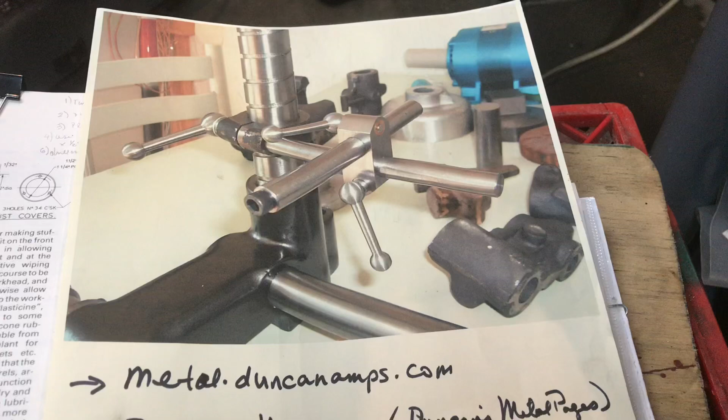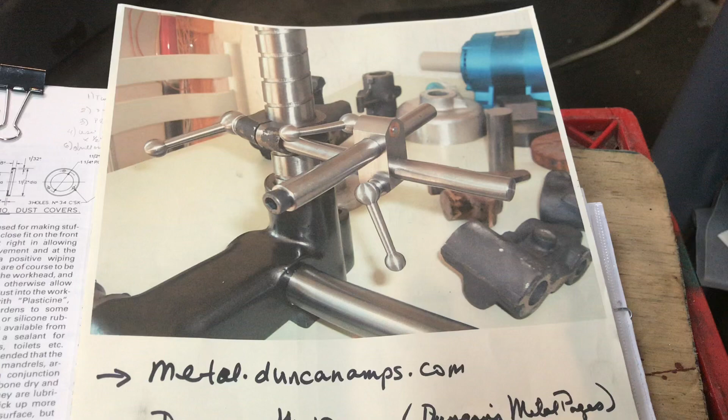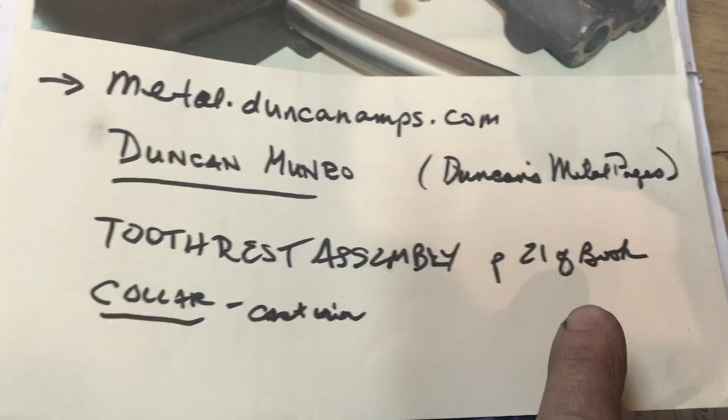I think I'm going to make this the intro and wrap up, and just like I did with last week's post, I will attach a bunch of short videos that I shot, little segments of some machine work to give you an idea. So here's what I've been working on. It's the tooth rest assembly. It's in page 21 of the book for the collar for the tooth rest assembly, and that's this thing right here. And I took this photograph.

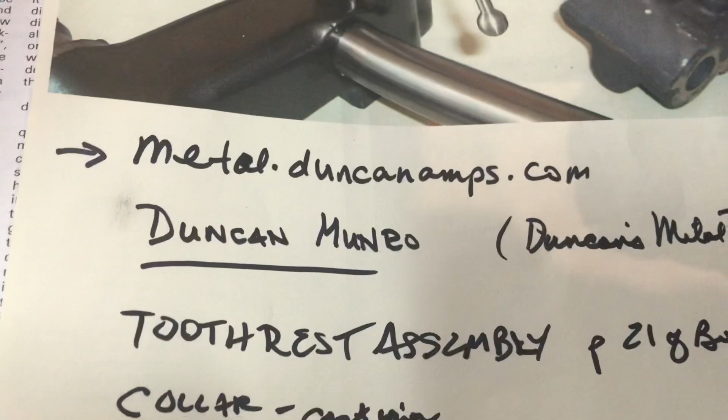This is one of the resources that I mentioned early on when I began the project, metal.duncanamps.com. It's a person named Duncan Munro, and on the page it says Duncan's Metal Pages. And so he's got a lot of small photographs. You can click on them, and I really appreciate this. So I clicked and then I printed it. So you can get a real idea. You know, they say a picture is worth 1,000 words. You get a real idea of how things need to be together and where they go.

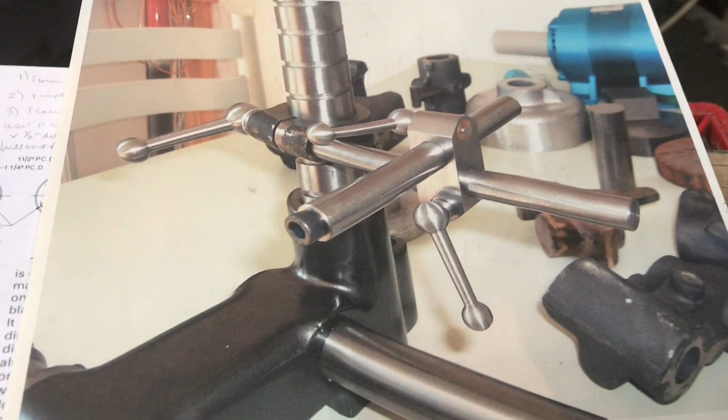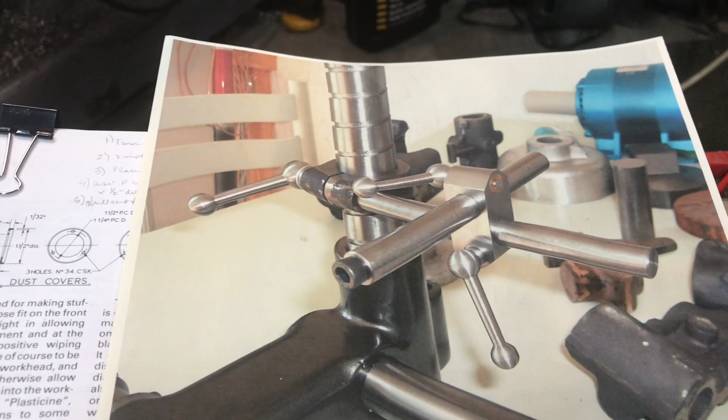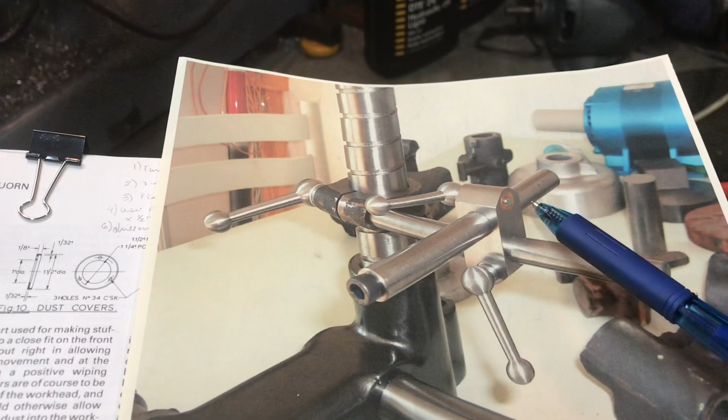Now, those of you that have studied the very much improved Quorn articles by Walter Mueller, you note that he basically doesn't use this whole tooth rest assembly. He has a different one, but then again, he's got that air spindle for his tool grinding. I plan to build this anyway. Two reasons. Well, I had the collar. The cast iron collar came with my set of castings, and then I've got steel pieces that I can make the rest of this out of. This is fabricated from steel, and I've got some nice stainless steel bar here as well.

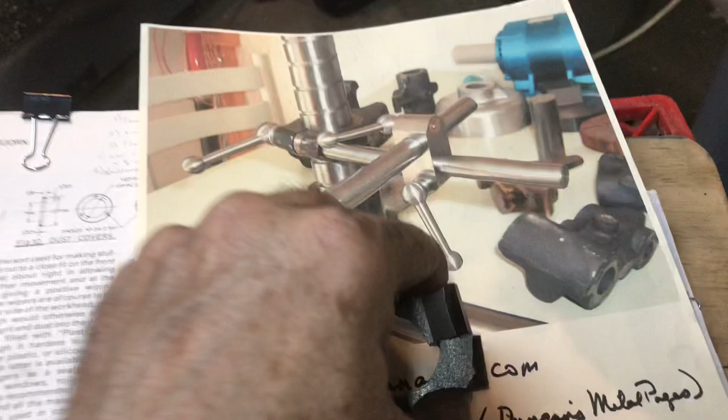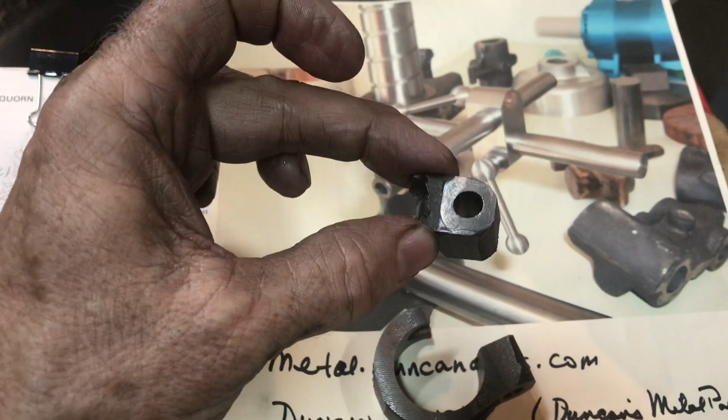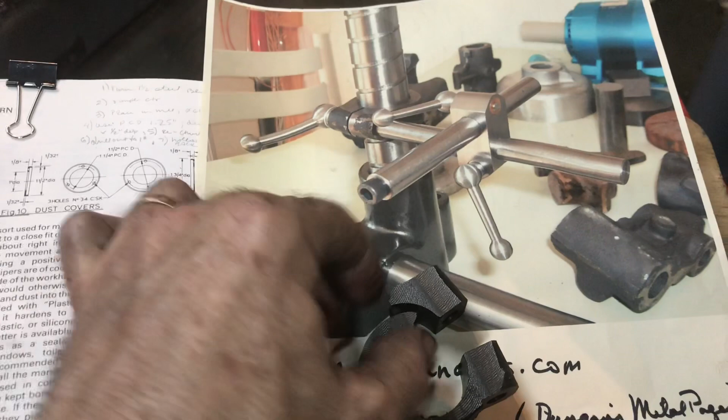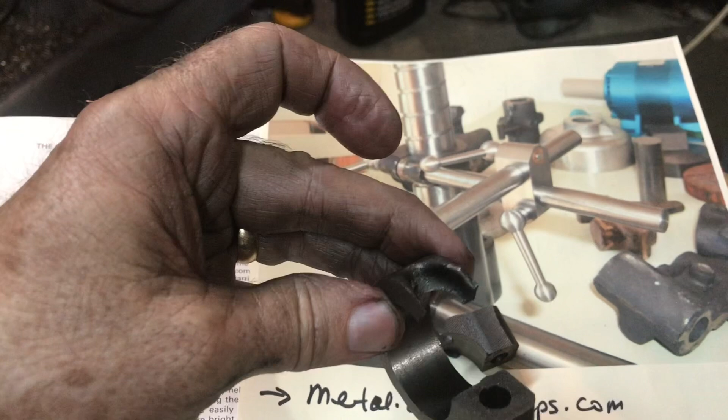And this I had just finished. I'm just a little bit aggravated right now, but oh well. I had just finished machining this thing. You'll see, if you want to see the rest of the pictures, and I was literally on the very last stage, was machining this flat here. This is where the bolt would go against it. And when I came in it, was like a 15 thousandths cut, just to give myself a nice little flat there. The dang thing broke, and the reason it broke is because the casting from not Hemingway's, but Model Engineering Services, that the original buyer of this set bought in the 70s, had this huge inclusion, which you'll see I point out in the rest of the video.

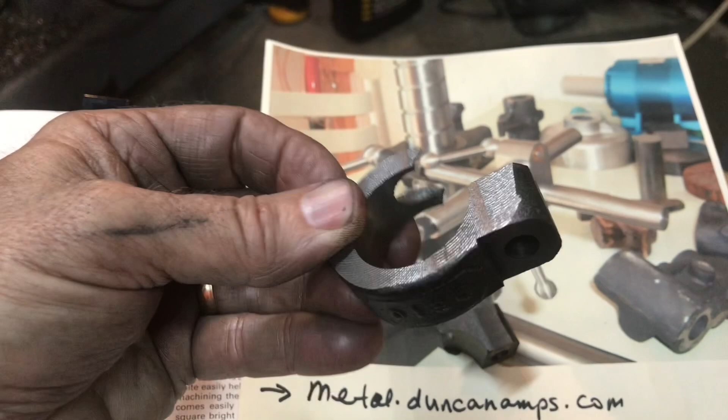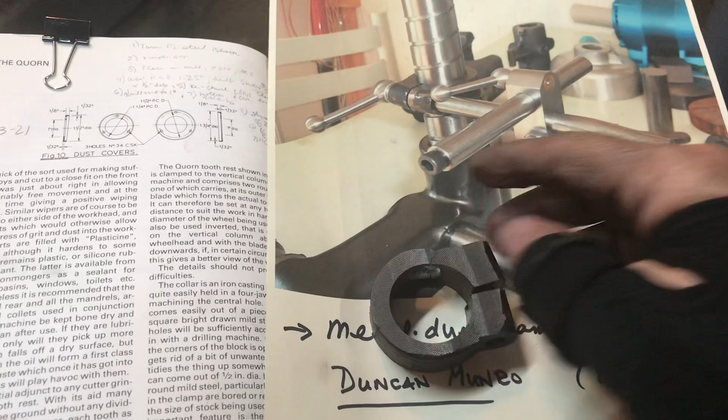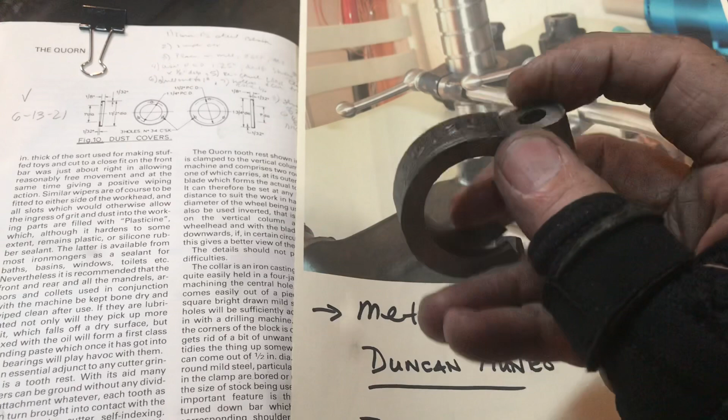I had no idea that it was this deep and that it was going to interfere with the actual bore, and I'm a little frustrated because I'm not the greatest at the boring head, and I had bored this thing. I mean, it was the perfect fit. It was maybe a half a thou over, so it fit on the vertical column. You'll see in a minute. But it had a really nice finish there and a very nice fit, and I had sawed through, I drilled, I milled a flat here, an 1/8 inch notch just now, for this is the side that the rod would have a little notch on it so it wouldn't rotate. I'm talking about it is like right here in the picture, right there.

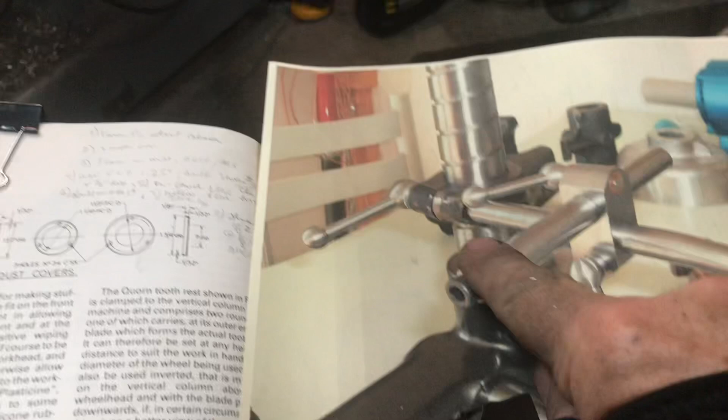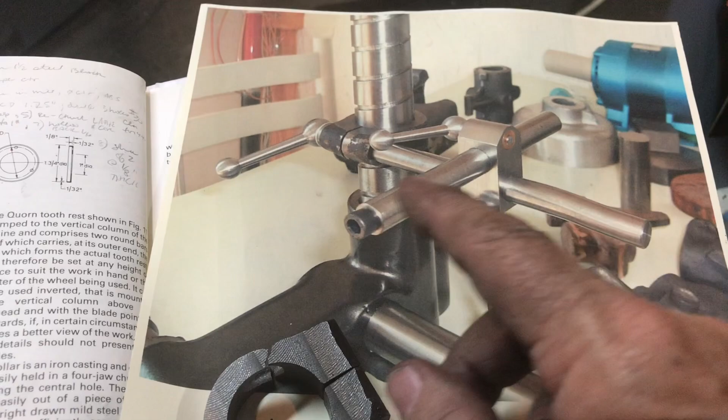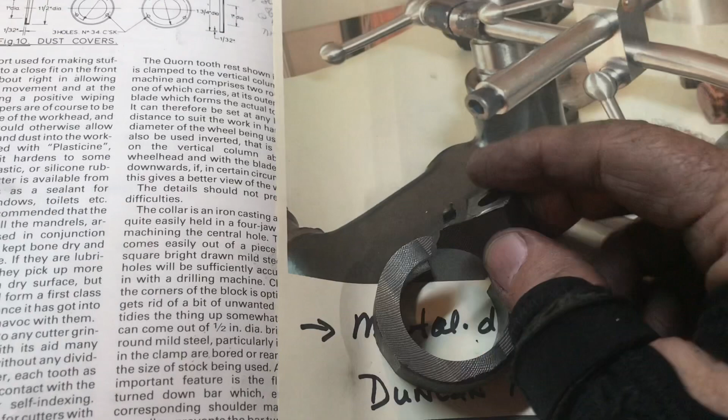So I was so excited. I was like, man, this is great. My plan was, it's Saturday night right now. I hadn't had much workshop time all week. I've been very busy, and I thought, this is great. I'll finish this part tonight, and then tomorrow I can make the rest of the parts. Then I'll have this thing done and ready to put it together with my Quorn, and that'll be one more thing checked off the list. Well, as I was machining that little flat, this thing just broke right off. It just snapped, and I'm so frustrated about that because it was done.

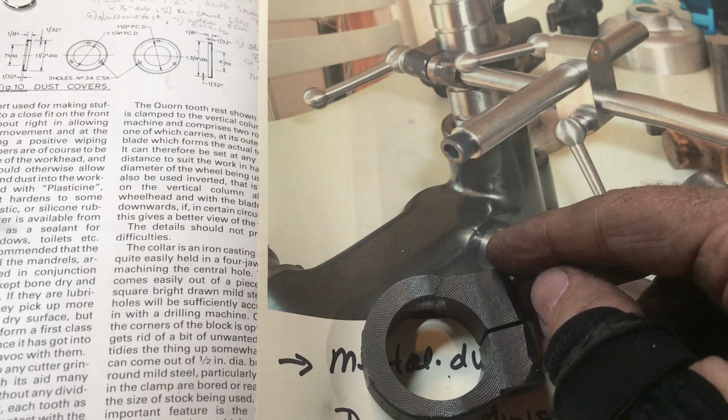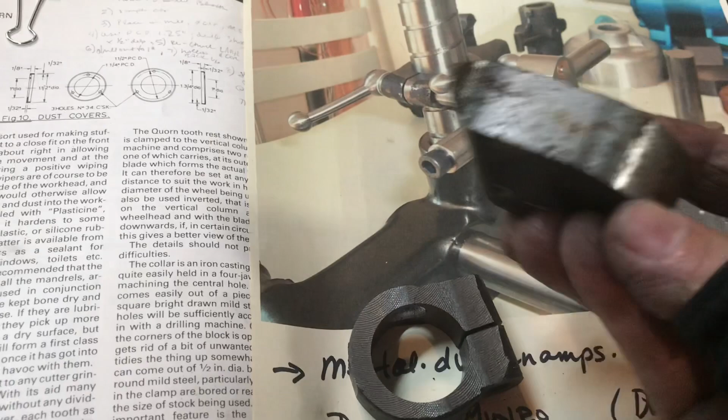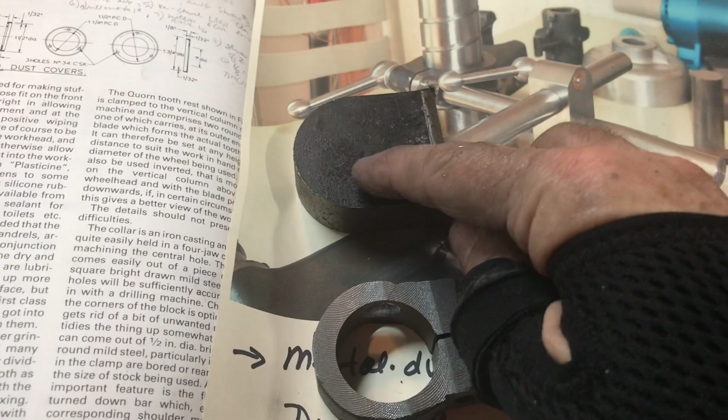But that is a serious inclusion, and I don't think there's anything. I don't know how to braze. I know a welding shop in town that can braze this back together, but I'd probably have to pay them $20 to do that, and it'd be kind of silly because I've got 3/4 inch steel chunks that I've saved from previous projects, and I think this is some more stuff that Russ gave me from the machine shop he used to work at. And as you can see, that's going to be about the right size. That's going to work out really well. So I'll just have to go and repeat all the steps to make the tooth rest holder out of this 3/4 inch steel instead of this cast iron.

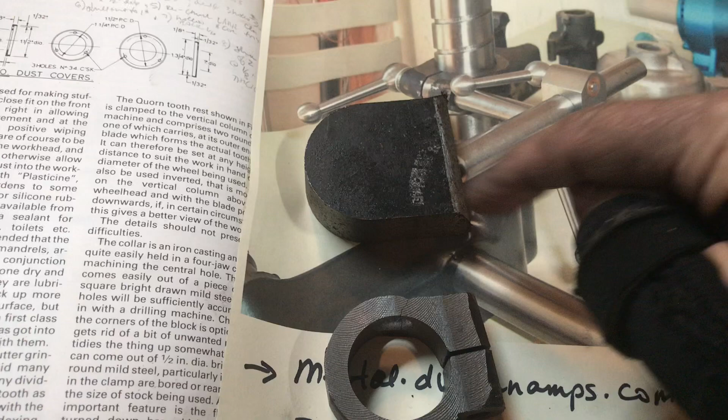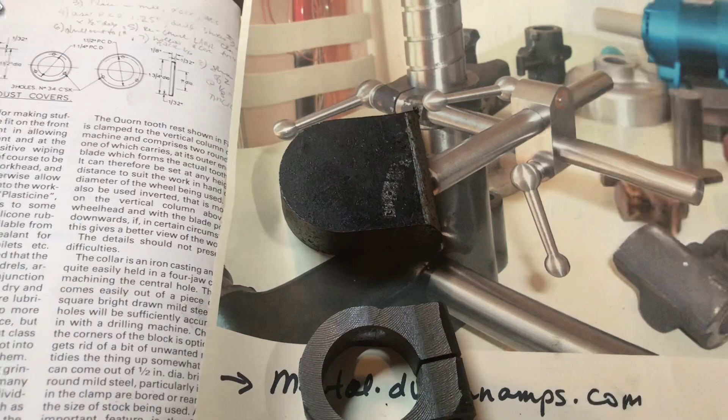But I would be having to fabricate anyway, because you have to fabricate this thing here. That's how come I had this steel stock handy. And so here's some more of it right here. That'll probably end up becoming that part right there, I guess. If not, I've got some other little pieces laying around. Never throw away your small chunks of stock, because you never know when they're going to come in handy.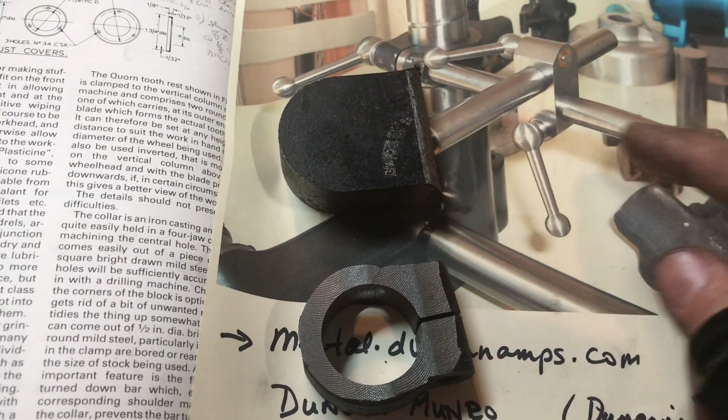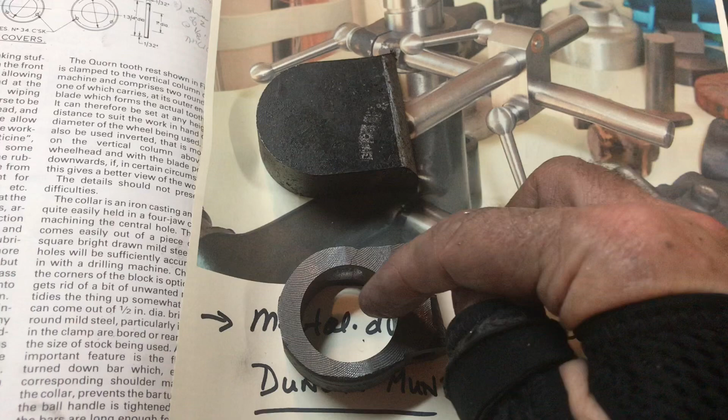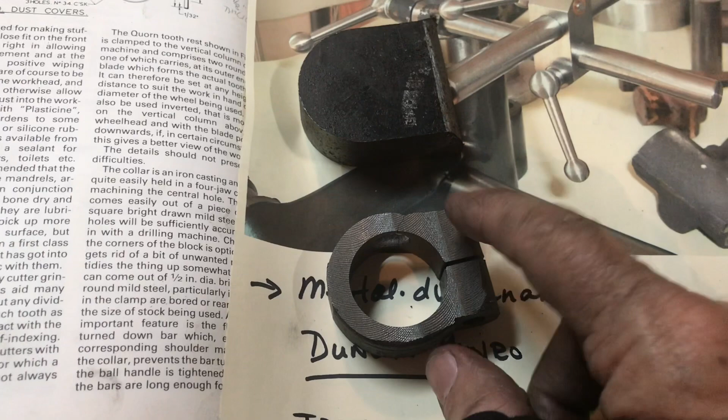So instead of having fun on the lathe and turning these fancy rods and getting all that put together tomorrow, I will be back at the mill again, working on this piece, recreating everything that I did here. So there's my little update. Stay tuned if you want to see some machining parts. I captured a little bit of the boring, the facing, the drilling, and those kind of things.

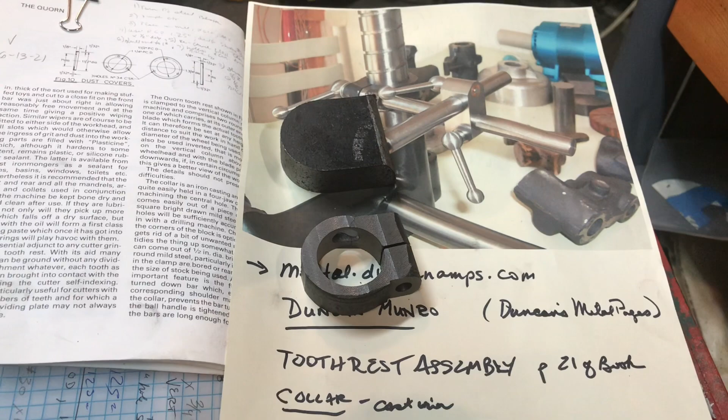Here I am preparing to do some more machining on the wheel head, the tooth rest collar that goes on the vertical column. I decided not to use the 4-jaw, but instead to use the mill. What I did first was to take it to the ordinary bench grinder, and I ground it flat across the top, and ground a little bit of relief on the bottom.

Then I milled it. I placed it face top down in the mill vise, milled off 20 thousandths to give myself a nice flat surface, flipped it over, and milled another 20 thou off the top. So now I've got it in the vise, and I'm going to start to surface it. I'll surface this side flat, and then I can flip it over and surface the other side.

I'll go ahead and surface it to 3/4 inch thick, and then I can bore it out to the 1.25 inch. The core hole here is basically 1 inch anyway, so there's not that much more that needs to come out. And then it's just a simple matter of drilling and reaming and milling a couple of flats on the end. But I'll get more into that as we go along and explain more of the process.

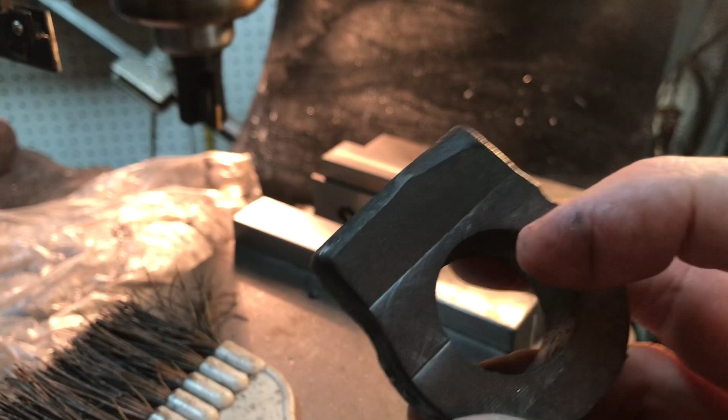So here you can get a better look at what I did with milling the top and the flat on the bottom. It's not very big. And then this side that I took 55 thou off of, it's nice and clean now, but the whole casting measures 725 thousandths now, so it's not even going to finish at 3/4. It's already 25 thou shy, so I'm just going to take a cleaning pass on there. It couldn't hurt to do that.

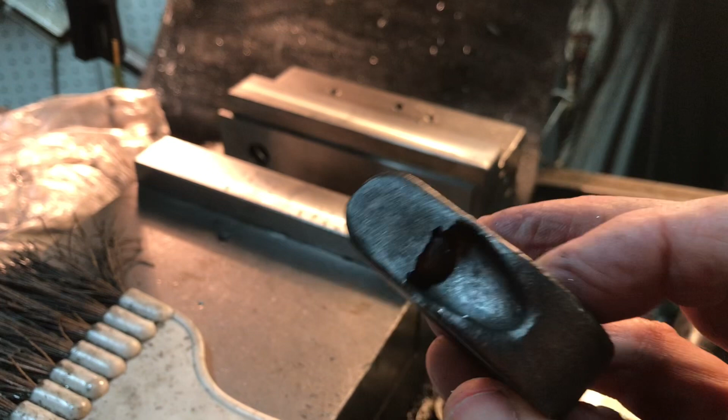And because I'm going to need to be gripping it this way for boring and milling these things. I have to mill a notch into this side for the tooth rest rod to go in. And this side, this is very interesting. When I first took a look at this casting, I assumed that this was some sort of special core hole that they made for some purpose. But now that I've studied the dimensions, the plans, and so forth, I don't think so. I think this is just a lousy casting that was included by the Model Engineering Services folks when the original purchaser bought these castings back in the 70s.

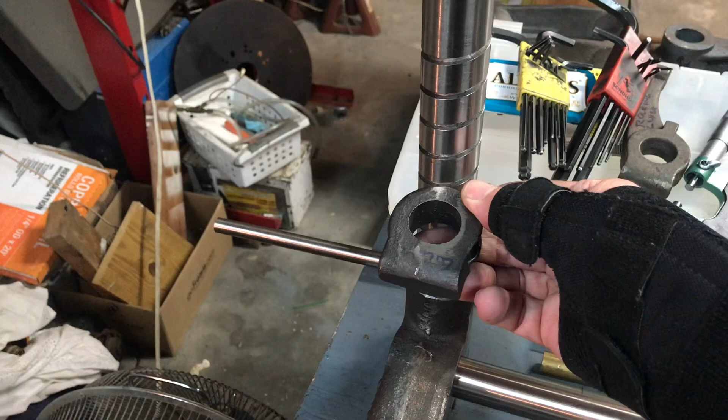So all this does is sit on the wheel head, and it holds the rods that stick out and become the tool rest. So the looks aren't that critical. That's a huge inclusion, though. I think that's what you call that in casting. Maybe I can fill that in with JB Weld before I paint everything.

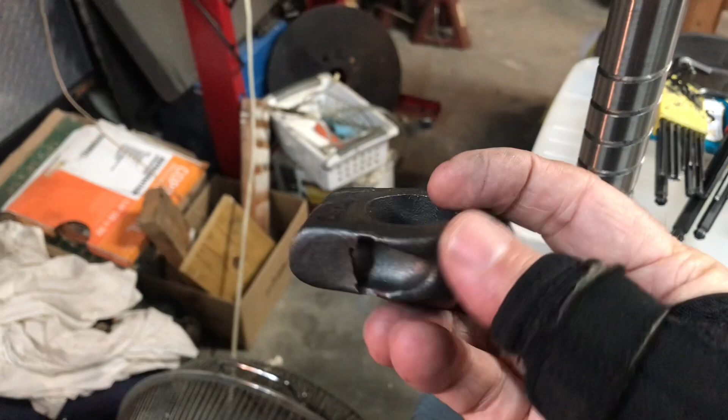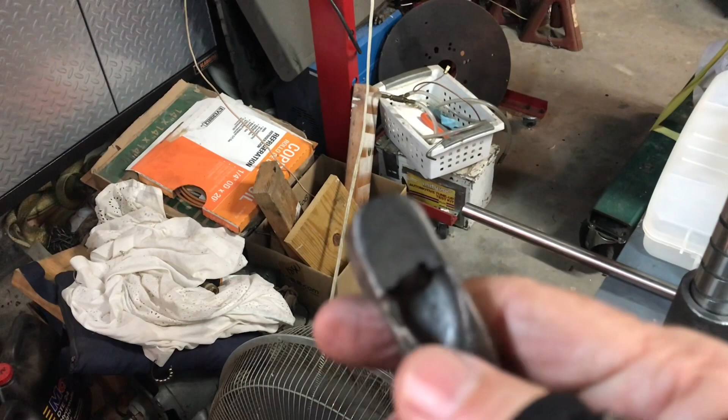I don't think it's going to hurt anything, because the idea is there's a hole bored through here, this is slit, and there's tension applied, and there's enough meat on that side that even after I mill a flat for the bolt, there's contact area there. But I thought that was interesting and something worth pointing out. So you never know what you're going to get. It's like the Forrest Gump principle a little bit.

Okay, enough of that. I'll just mill this side off and bring you back when we get to the next work holding setups for the drilling and facing a couple of spots here.

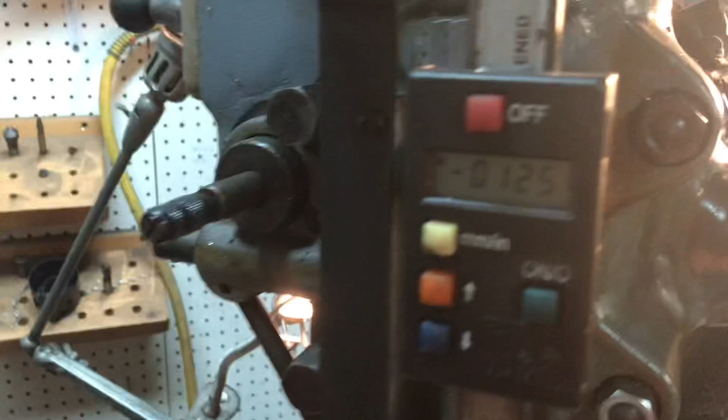Okay, I've finished machining the second surface, and I ended up taking off an even 1/8 of an inch, 125 thousandths. As you can see, it's not perfectly flat, but it looks pretty good. I'll just file that down a little bit, brush up the dust, and just leave it be for tonight. As I mentioned, the core hole itself right now is about 1 inch, so it really doesn't need to be bored out that much to get to 1 1/4 inches to fit on the vertical column. So we'll get it to that, and I'll show you how.

Working on a tool rest collar. As you can see, I'm doing it on the milling machine. I'm boring the hole now, going up to 1 1/4 inches. I have about 80 thou left to go. I'm right at taking off 40 thou per pass, so 20 thou per side. I'm going to go a little deeper and test measure.

Just wanted to catch a shot of this. What's interesting, the void that was in this casting, I didn't realize how deep it was and that it was going to penetrate into the hole. I don't think it's going to affect the functionality, but it sure got my attention when the boring bar first started going through that little gap there, made a heck of a lot of chatter. I thought something was wrong. Stopped the machine to check it out, and I realized what the deal was.

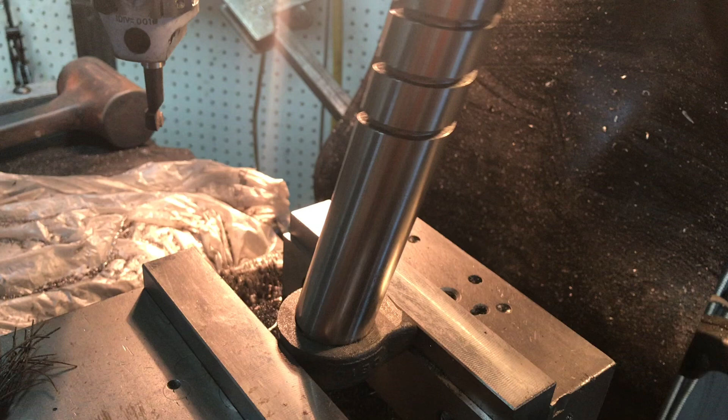Alright, just real quick, another example of why I'm glad that I did not Loctite the vertical column into the base. That is a very good fit. There's very little extra room in there. It's going to get split anyway, and of course I got to fill up the side with JB Weld or something, but really happy with the fit, the boring bar. I'll keep you posted on the other operations.

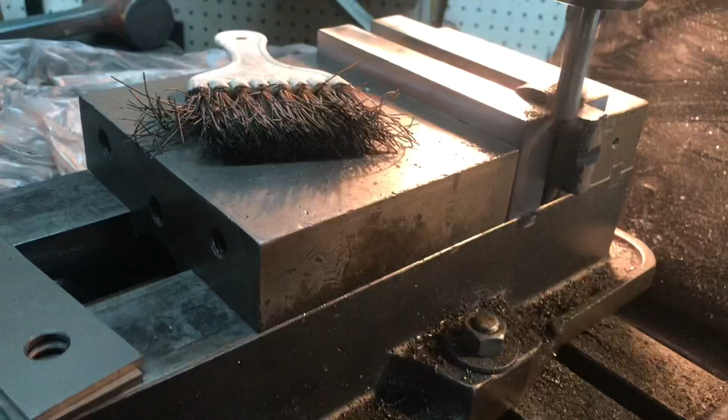Here I'm milling the notch, the flat spot on the tool rest collar. Got a 5/8 inch end mill. Milling a flat spot for it. Set it up so that the part barely cleared the vise. I'm going to move this out from here. Mill off that edge. And I'll bring it back to my 0 and drill the 5/16 inch hole all the way through.

As you can see, hopefully, it's going to mill off. I've already marked the center line too. I measured and marked the center line for the slicing cut before I milled off this flat. So next thing I do is drill and ream the 5/16 inch hole, flip it around and mill a similar flat on the back.

And after I got the flat spot machined down for the rod, now I'm drilling a pilot hole. It's like a 7/32, I think, pilot hole. Just want to show that, this is nice cast iron, and it is actually fun to machine cast iron. It's a little dirty, but it's a neat material. I just wish it was easier to get and cheaper.

So after I get done drilling this pilot hole, I'll drill the through hole with the 5/16. As you can see, I'm using a stubby drill. If you can get stubbies, they're very handy. It saves you space on your Z-axis on your mill.

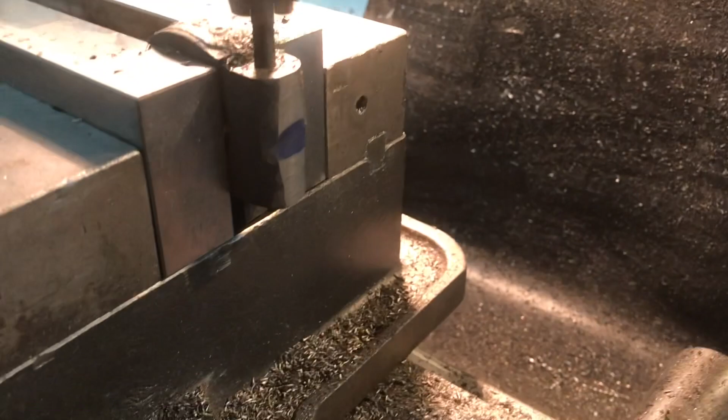Okay, here I am putting the slice in the casting. I'm using the very slow speed back gear on the Bridgeport. Sorry about that jerky camera action. I'm just excited because it's going pretty good. I'm using some tap paste as a lubricant as well. So it's going super slow. I'm feeding nice and easy. So far, so good.

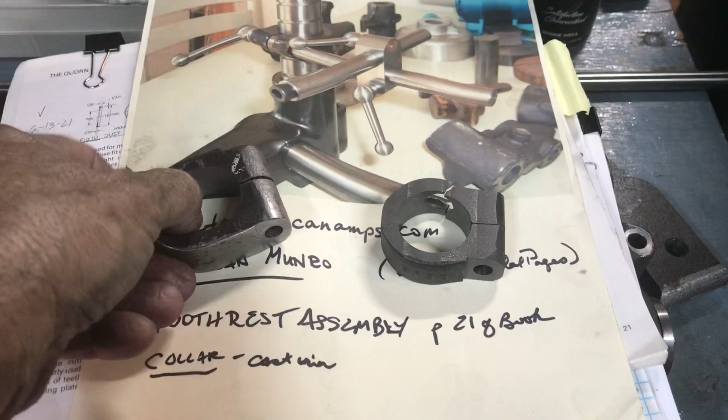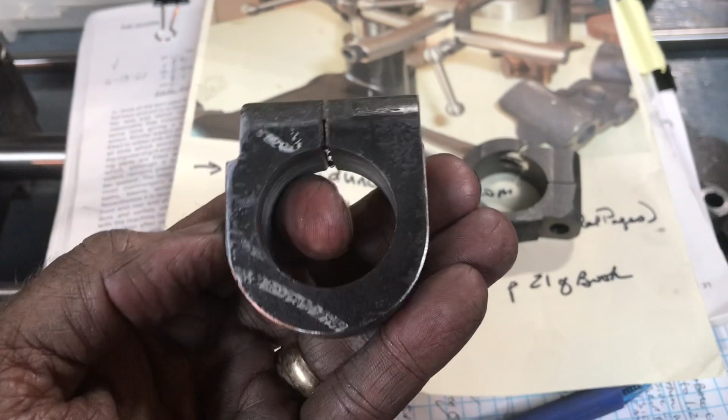Alright folks, here's a little epilogue. It's still Saturday night. I had that beautifully shaped chunk of steel that looked like it would work, and sure enough, in about 2 hours time, since I had just done all those operations to the casting before it cracked, I thought I'll go ahead. I had finished putting up all the tools. I try to put everything away when I get done, but I went ahead and pulled them back out again, and I didn't have to thickness this thing. I just belt sanded it to get it smooth, milled it a little bit on the edges, drilled it, made the notch, drilled and bored.

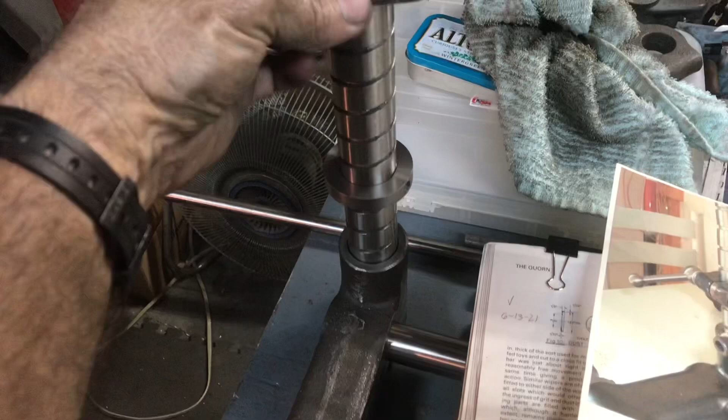That was probably the most time consuming process, but I got a decent finish in there, and the fit is good. Even though it's slit, I was afraid it would spring real tight, but it didn't. I guess the steel is so thick, so it should be able to tighten up okay, and a pretty decent substitute for the casting that broke. So yay, happy ending to that.

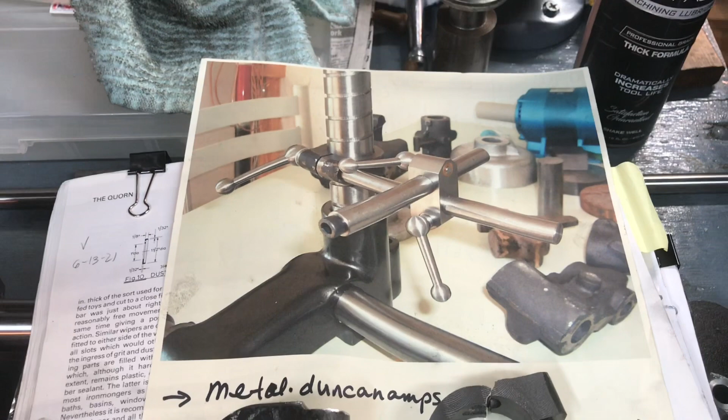And now I get to make the rest of the pieces. Maybe I'll be able to do those after all. I'll probably post a separate one, because each of those little bars and so forth is a little bit of work, as well as the cross piece here. I'll be making that out of steel, possibly this little chunk right here.